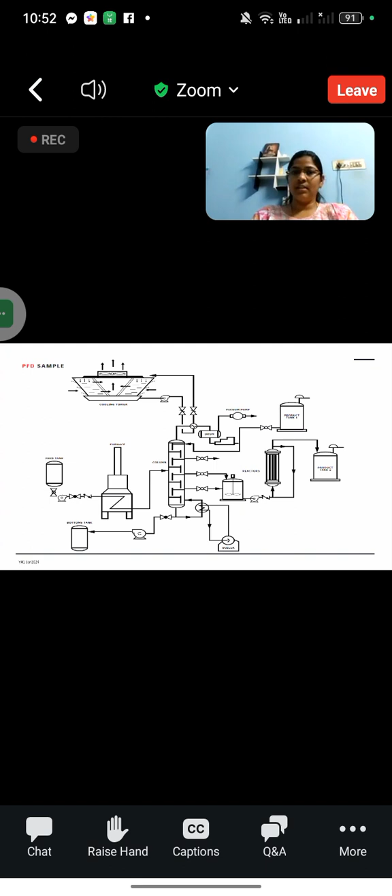HAZOP terminologies. First, this is called PFD. PFD is process flow diagram, which shows all the equipments, pipelines, everything in a brief manner. So if you see this, you can identify what is the product you are handling, where is the cooling tower, the fractionating column, what are the inputs, that means what are the upstreams and what are the downstreams also you will be knowing.

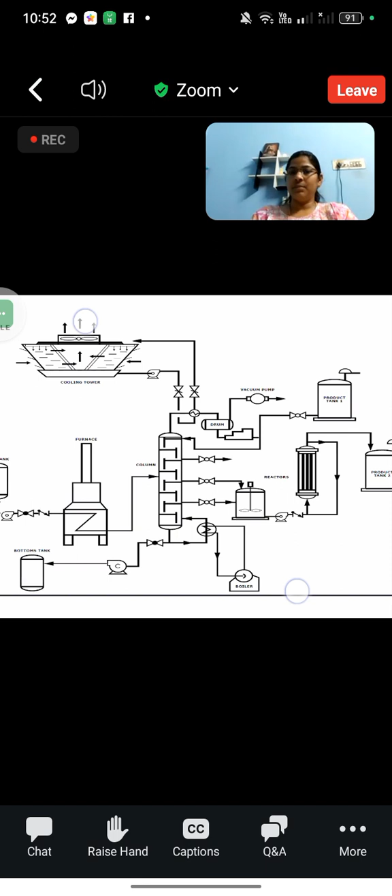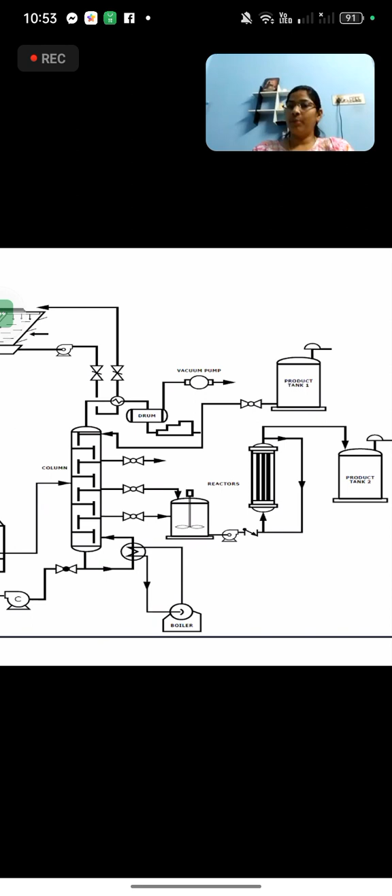So how the HAZOP is different from other hazard identification techniques is mainly in HAZOP, in design phase, after you get your design parameters, that means my fractionator has to work at 50 degrees temperature only. Its pressure has to be at 2 megapascals only. That is the designed parameters, that means your intentions. To get a product, you require some important operating parameters like pressure, flow, level, temperatures.

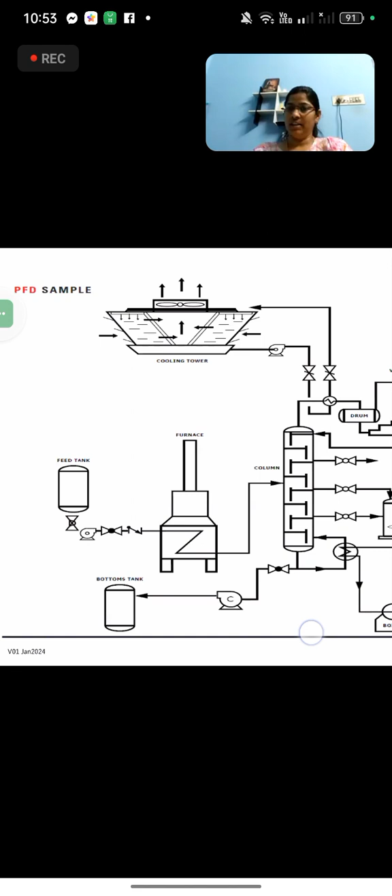So if all this deviates, what are the hazards that we are going to identify in the HAZOP study? HAZOP means hazard and operability study. The deviations in the operating parameters will cause some of the hazards. So how we have to do, which element we have to select, from where we have to proceed, how to proceed, all this we will see in the further slides.

So this is PFD. As sir has mentioned, what are the documents required for the HAZOP methodology? First thing, you require process description. What is your process? Then you require the process flow diagrams, utility connections. You require P&IDs. This is called P&ID, that means process and instrumentation.

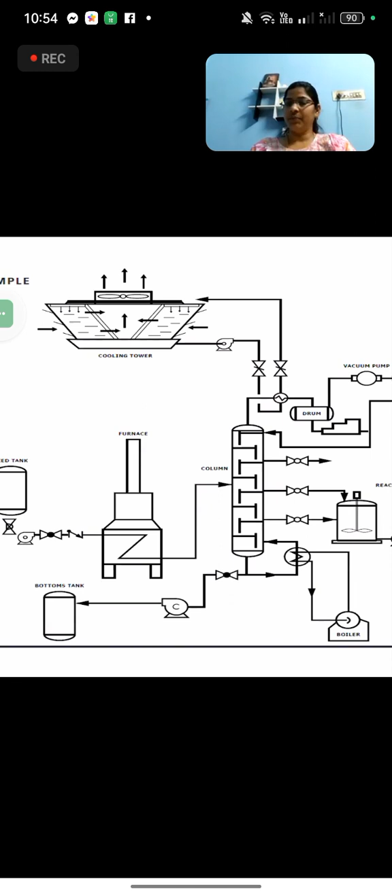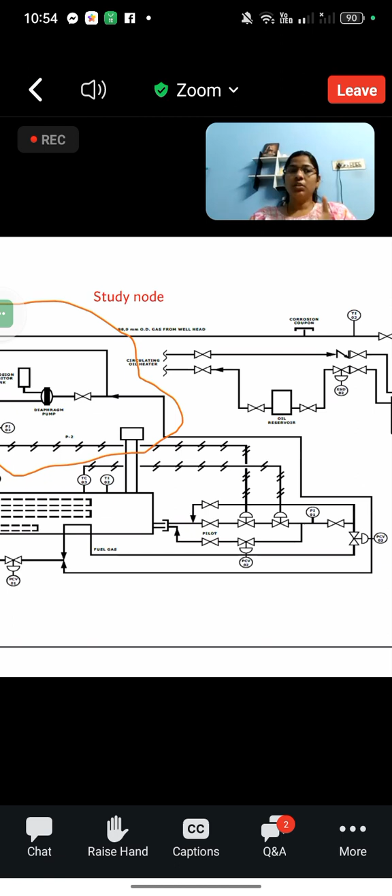Suppose you have a fractionator here. To control the flow, what is the input? What instrumentation you have kept? If it is malfunctioning, what is the failure? So this is the P&ID, process instrumentation diagram. And if you see this, you require a specialized skill to identify the elements.

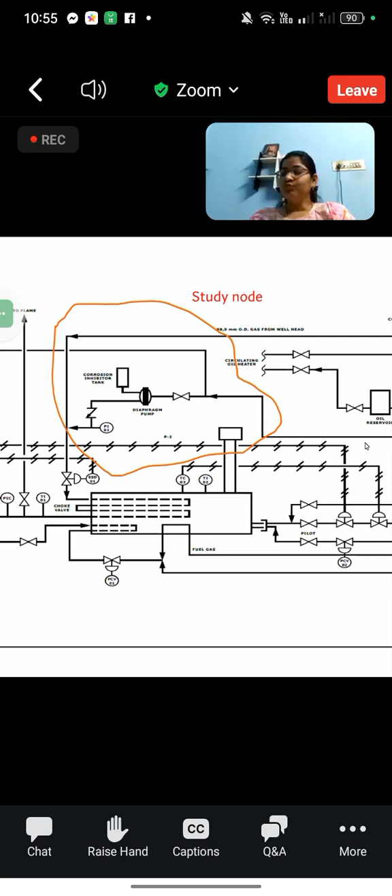Suppose this is a valve. This is a pressure control valve. This is a pneumatically operated valve. This is a manual valve. To identify the nodes and the equipments, you require some knowledge about the instrumentation diagrams. If this is the line, this is the supply line, and this line is going to the plant.

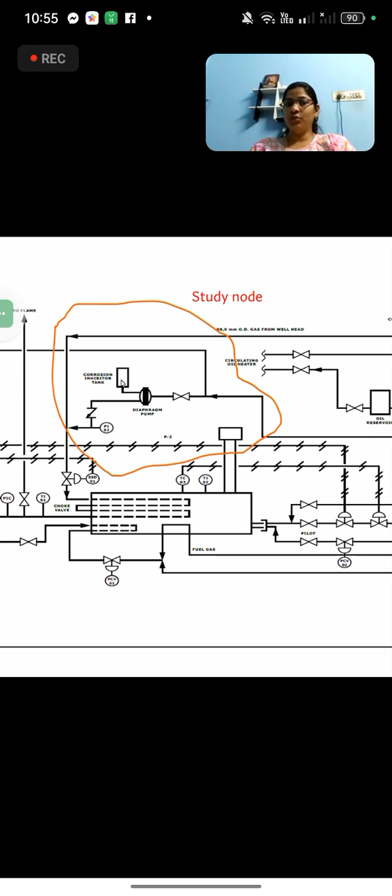So if this is the whole system, you cannot do HAZOP for the whole system. You have to select some of the nodes. Suppose in the whole system you are selecting only the diaphragm pump and the tank, then you have to study.

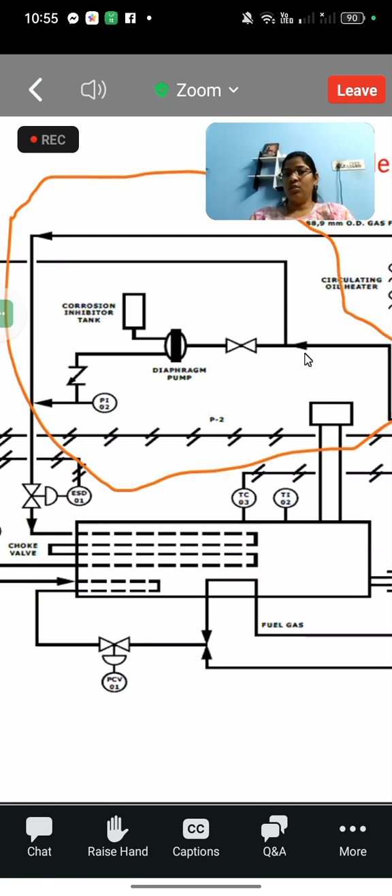So in this line, what are all the pressure, temperature, what is my flow rate? Simply, if the pump is delivering high flow rate, if the pump is delivering low flow rate, what are my consequences?

That you have to study. What could be the causes? That means this is the diaphragm pump. Maybe this is operated by pneumatic supply. So my supply pressure is less. So whom I have to contact?

So HAZOP is a proactive study. That means you're not doing it after the accident. You're doing it before you are commissioning. As sir said, you are doing this in a design phase. Some of the people have asked, what is PHA? What is the difference from HAZOP?

PHA is done at the pre-design phase. That means you have not fixed any of your operating parameters. You don't know what your parameters are to get your desired product. That means you have to manufacture sulfuric acid out of sulfur and H2O. Okay, so you don't know what parameters you have to fix to get it.

Or for ammonia, you require hydrogen and nitrogen to produce ammonia. So literature will be giving you certain parameters, but even with the simple reaction you cannot create a product. Okay, it requires so much knowledge.

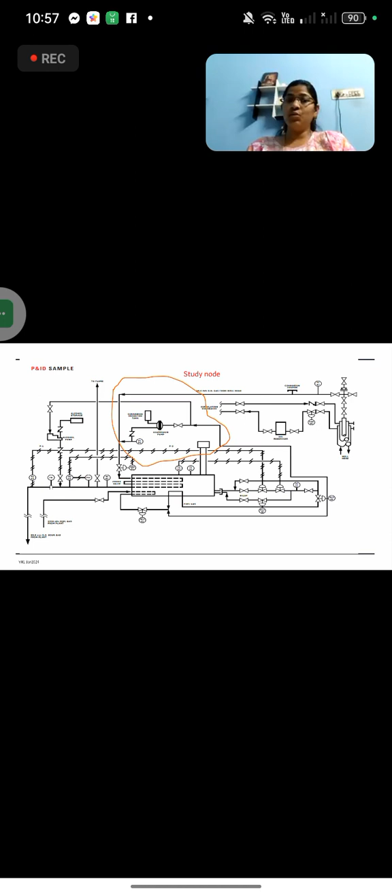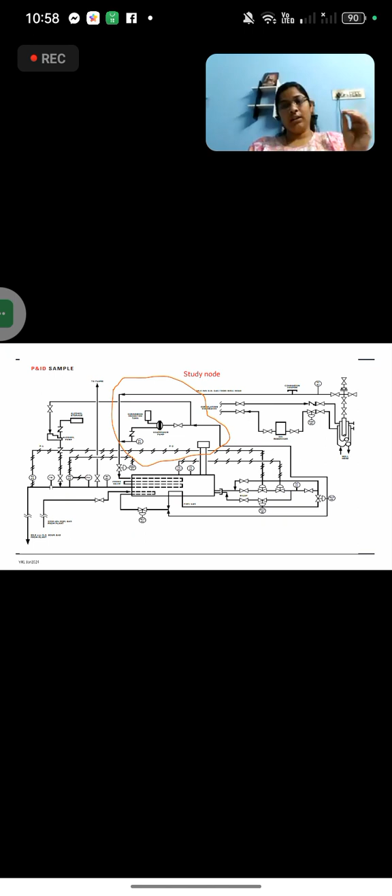I require my instrumentation team to tell me how I can recognize my pressure is low for this diaphragm pump. Okay, so if the pressure is low, can I put it as an interlock not to operate my diaphragm pump? So it should indicate to me somewhere that the compressor is bad. I am unable to produce the compressor pressure. I cannot operate the diaphragm pump. I cannot deliver the sufficient flow rate. Okay, so studying each individually is called HAZOP.

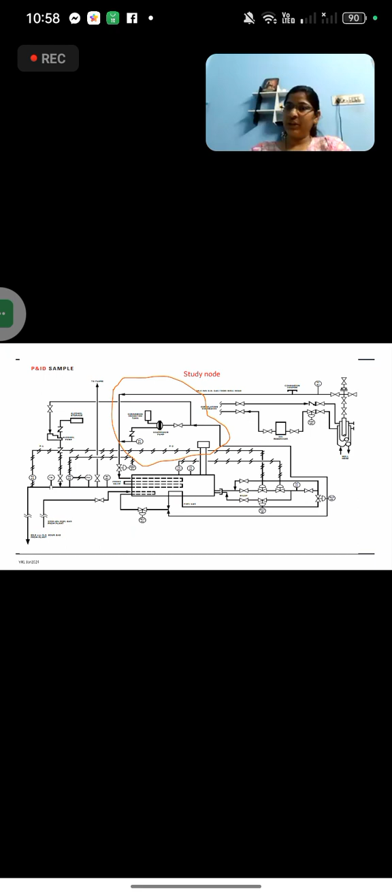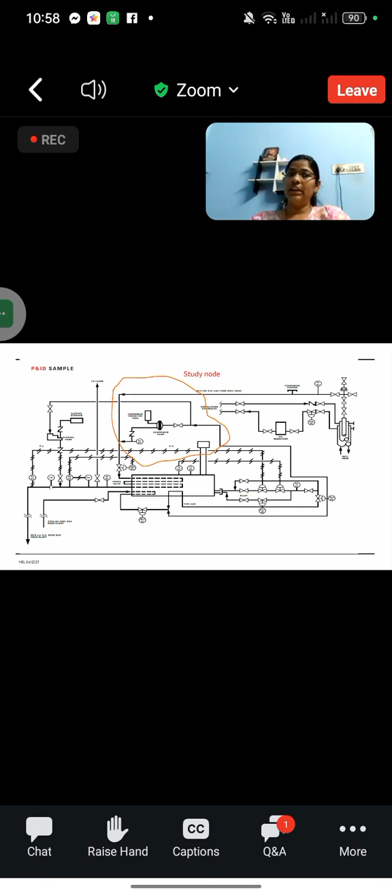Okay, so FTA and ETA also some of the people have asked about. FTA and ETA are detective analysis or reactive analysis. That means after the accident has occurred, you will be finding out what the causes are for this accident. Whereas HAZOP is a proactive study and it is done at the design phase, and as sir told, it will include so much of the team, because to set up a big plant you require all the professionals. Okay.

Okay, so as I told, selecting which part you want to study is called the study node. Your point of interest is the study node. So a study node is a specific point or an element within a process or a system that is examined and analyzed for potential hazards or deviations.

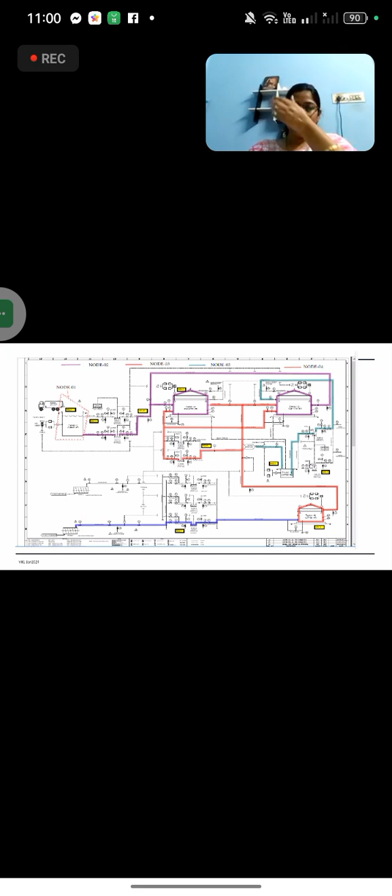My level, I don't want overflowing, so an indication should come from this tank that a certain level has been reached. Okay, then it has to indicate to the operator that the float has reached a certain level, so no more flow. The operating parameters in my tank, not to have an overflow, the indicator.

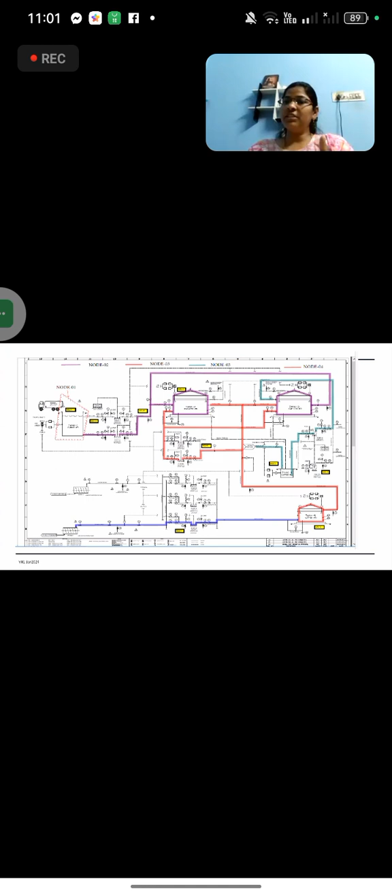And this may be like, if it is vaporizing, it is producing so much vapor. Okay, so the liquid will produce more vapors when the temperature is sufficient. Suppose my liquid boiling point is 100 degrees, like water. If the temperature is increasing beyond 100, my liquid will vaporize. So I'll be monitoring. So high temperature means temperature above 100 degrees. That means, then what is the deviation?

I'll be studying. So when you're studying all this, what is your outcome? Your outcome will be the hazards. If the temperature is above 100 degrees, it will produce vapors. So those vapors may catch fire if you have an ignition source. So you are identifying the outcome of the deviations which leads to the hazards. Okay, that is called hazard and operability study.

So study node is what you are selecting. Next, intention. Intention means what is my outcome? Suppose, for example, I have to manufacture ammonia. Ammonia is NH3, nitrogen 1 molecule, hydrogen 3 molecules, and for this I have to give 2 molecules of nitrogen and 3 molecules of hydrogen, so that I can produce 2 molecules of ammonia. So 2 molecules of ammonia is my intention.

Instead of ammonia, that is NH3, if my process is giving me some NH2 amine, that is not my intention. My intention is to produce ammonia. So for that, what are my inputs? What are all the deviations that may come? Flow of hydrogen, flow of nitrogen, pressure inside the tank, temperature inside the tank. These are the designed operating parameters. That means 2 molecules of nitrogen has to be filled in the tank and 3 molecules of hydrogen has to be filled. Not more than that, not less than that.

And temperature has to be maintained at some 150 degrees and pressure has to be maintained at 5 megapascals, and there also not more than any tolerable limit. 5 megapascals means maybe 5.01 megapascals is allowed, but not more than that, because in our processes everywhere tolerance is there, because we cannot fix it with the existing setups. So my intention is this. If it is deviating from any of this, that may lead to a hazard.

Deviation means departure from the intention. That means my intention is 2 molecules of ammonia, 2NH3. Instead of it, 3NH2 was formed, it is a deviation. Temperature has increased, it is a deviation. More than 150 it has gone, less than 150 it has come. My jacket water is not working, that is a deviation. My pressurized reaction has to be carried out, somewhere a pressure leak is happening, I am unable to maintain 5 megapascals. That is deviation.

Instead of nitrogen, some pipeline has been interconnected because of my new employee. Instead of nitrogen, some chlorine gas has been introduced into the reactor. Chlorine plus hydrogen, what will form? HCl acid will form. That is totally a deviation and it will lead into a big mishap. Mishap means accident. So the deviations we know, the intentions we know. For each parameter, if it is deviating, what are all the hazards we have to find out. For deviating these parameters, what could be the causes we have to find out in HAZOP methodology.

Causes means what are the factors or the conditions that lead to deviations we have to verify. We have to come out with brainstorming sessions. So consequences, as I told, instead of nitrogen, chlorine supply was given. What could be the consequence? HCl is highly concentrated acid, more than 33%. No ammonia has been produced yet. Instead of it, it is going beyond a certain temperature. It will lead to explosion. It could be a physical explosion without fire. It's like a hazardous environment.

So guide words and intentions. Our operating parameters, most of the operating parameters are like temperature, level, pressure. If these are deviating, how to do? The words are simple words like no, less, other than, more, like that. These are the simple guide words. Add them to your operating parameter, then you will get the deviation. So these are the guide words: no, less, more, part of, as well as, reverse, other than.

No means negation, totally. Nitrogen was not filling, only hydrogen is filling. In a reactor, if two chemicals are there, only one is filling in the tank and the other chemical is not being supplied, and the same temperature and pressure is maintained, it will become a big hazard. That means nitrogen is not there to consume the hydrogen. Hydrogen is a highly flammable gas. If you are bringing it to a flammable limit, that's all, it will explode, in a confined reactor environment.

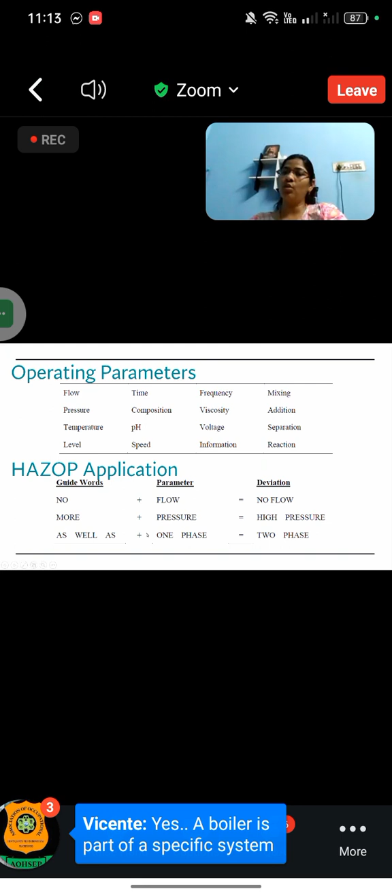which... than 5 megapascals, that is becoming 5.5 megapascals. High pressures are always like bombs. Then, instead of nitrogen plus chlorine, nitrogen, chlorine and hydrogen is coming. What are the favorable reactions that will form? Because nitrogen is an inert gas, it will stay like that. Nitrogen atmosphere may form reaction under nitrogen atmosphere.

So we'll see the HAZOP method. How we have to do the HAZOP, so how to do HAZOP we will see now. So preparation, we have to select the team. Okay, what is your

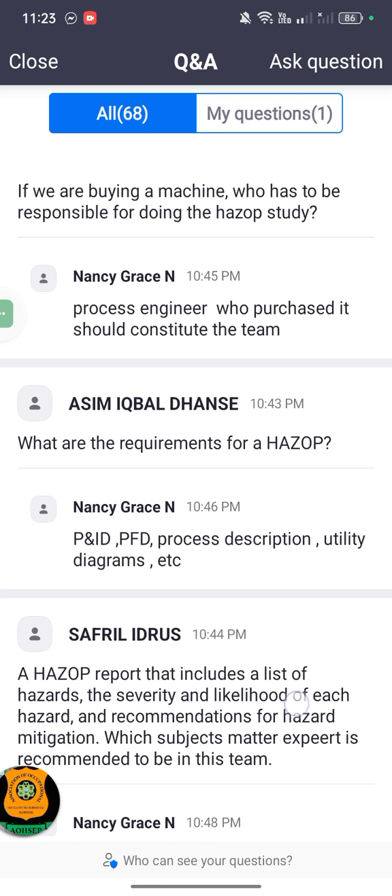The ultimate thing is production. Production means if you lose 1 hour of production time, the loss could incur in lakhs, or in some places it may go to crores also. So how fast can I come back?

How fast can I come back and rectify this? I can rectify very fast when I know the situation, when I know if this happens, what is my immediate corrective action? Usually they will be doing periodical maintenance, corrective maintenance. What is my corrective action? What is my immediate remedy? How to mitigate the hazard? All this comes under impact analysis.

And risk prioritization. As I told, HCl will have a higher risk and water splashing will have a lesser risk. So low risk activities usually will be taken care of by detection mechanisms, and sometimes we will separate them from the process areas. Like this, first we have to prioritize the risk, then identify the redundancy mechanisms and corrective actions if it is occurring in real time.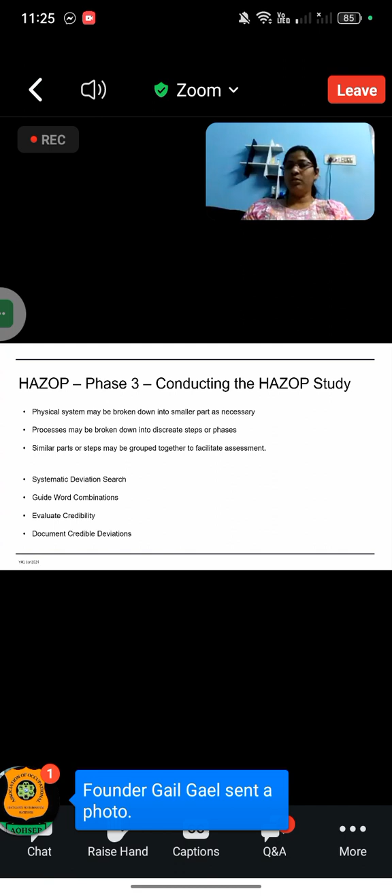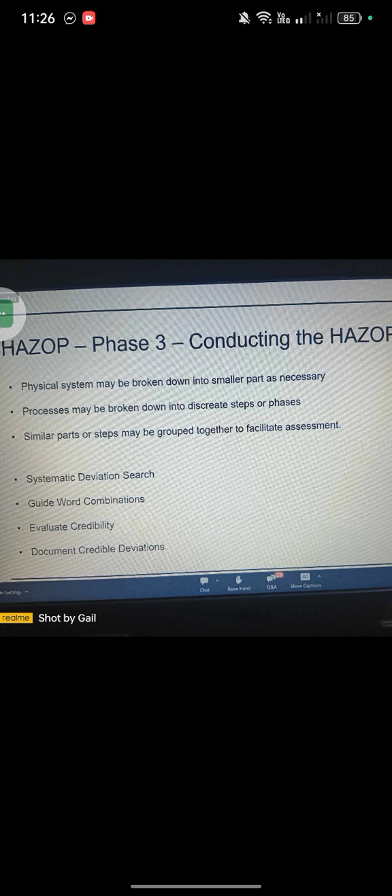You have to apply 2 or 3 guide words for a single parameter also, and guide word combinations also you have to do. All these things have to be recorded properly, then only you can mitigate the hazards in real time. This is done at the design phase, and as sir told, it will be done after the modification. Any modification occurring means then also it will be done.

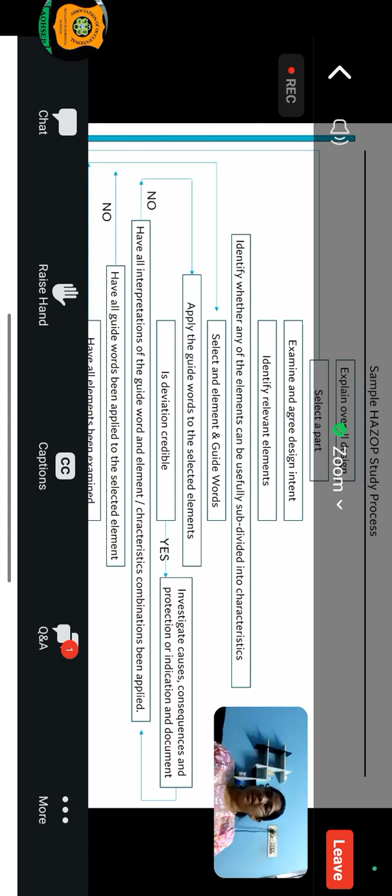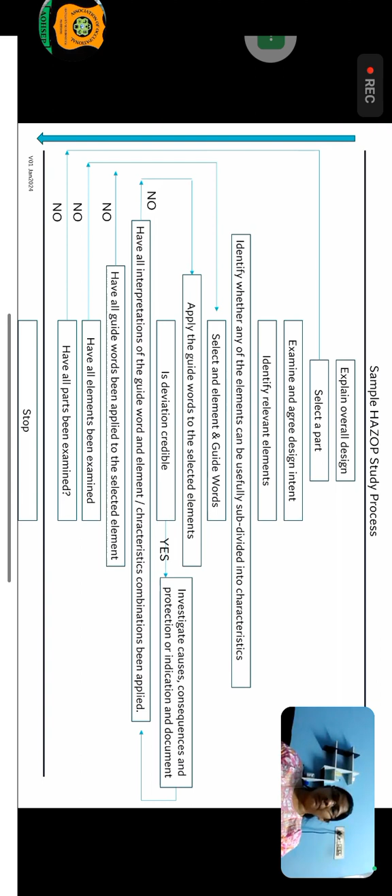So this is a sample HAZOP study process. First, explain the overall design, select a part, that is the study node, examine and agree on design intent. All the team members have to agree to the design operating parameters. Identify relevant elements, identify whether any of the elements can be usefully subdivided into characteristics, select and apply the guide words.

Is the deviation credible? That means the deviation may lead to hazards. Then immediately investigate causes, consequences, and what could be the detection mechanisms. Then have all interpretations of the guide words. Have all guide words been applied? That means again you have to select another parameter and apply the guide words and examine whether the consequence analysis is sufficient or not.

Based on that, remedies are sufficient or not. Apply the guide word, generate a deviation, probable causes, and possible consequences. Next, we have to document the deviations, record the consequences, and recommend corrective actions.

Why do we have to do this? We are doing this exercise to prevent accidents, to mitigate the accident. If at all it is occurring also, we have to bounce back, immediately rectify the hazard, and protect our workers, environment, and property.

Instead of visual inspection, consider an alarm for low detergent reservoir level as the future action. With this, you can get the level through a level indicator - through a float you can control the overflow also, and the level indicator will give you the level indication in the tank. So whose job is this? It is the engineer's job, the process engineer's job.

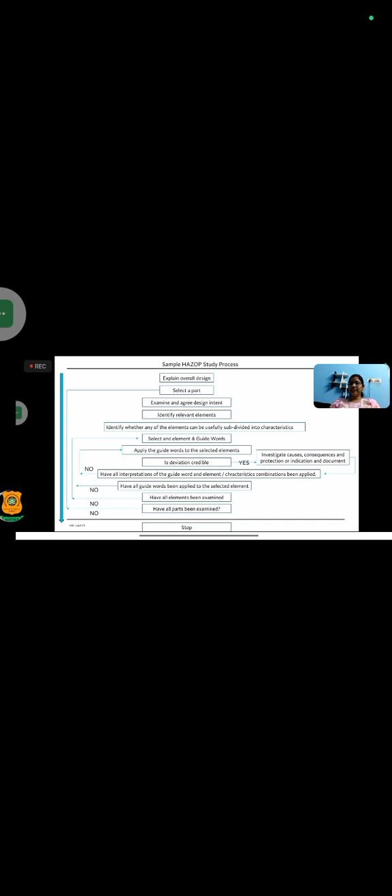HAZOP action - whatever action we have just seen, that has to be recorded.

So documents for HAZOP review: updated process and instrumentation diagrams, operating instructions, a plot plan with the location of various equipment items. The plot plan will tell you additional consequences, like where the pipe is bending, is it coming from underground, is it going above the reactor or below the reactor. All these things matter because this may lead to obstructions also.

Process flow diagrams, interlock description - that means, as in the previous example, if a tank is having an interlock that below 30% level, the cleaning operation or cleaning machine will not start. That is an interlock. Set points for all the interlock sensors.

Vessel capacity, design pressure - vessel capacity means I have to fill a 1 meter cube volume, say 500 liters, literally half. So capacity is a must. And design pressure - when you are designing a vessel, the thickness of the vessel is taken care of based upon the working pressure inside the tank.

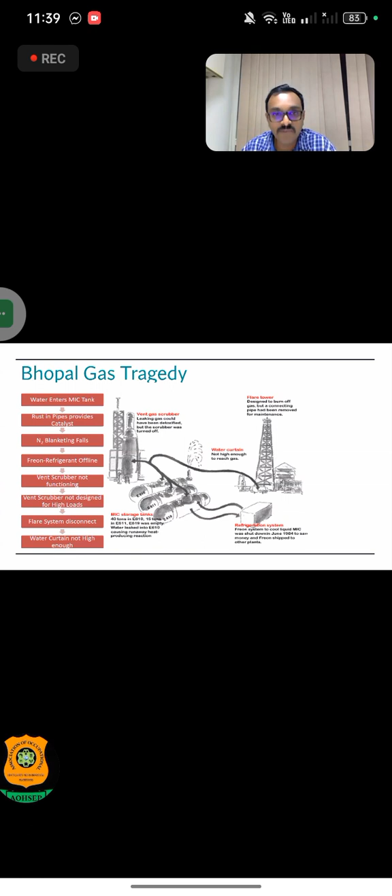As all of you know, what happened in the Bhopal gas tragedy was a complete misconception of the entire engineering technique itself, where they hadn't identified what could go wrong. Yes, she's back, over to you Nancy.

Okay, so if they would have done the HAZOP study in 1984, that means if the pipeline disconnected to the vent scrubber in the case of the MIC gas releasing, they would have analyzed the consequence. The water curtain, what height it is reaching, whether sufficient flow is there for the water curtain, what could be the consequence. For safeguards, if they would have done the HAZOP, they could have saved thousands of lives in Bhopal. So water enters the MIC tank.

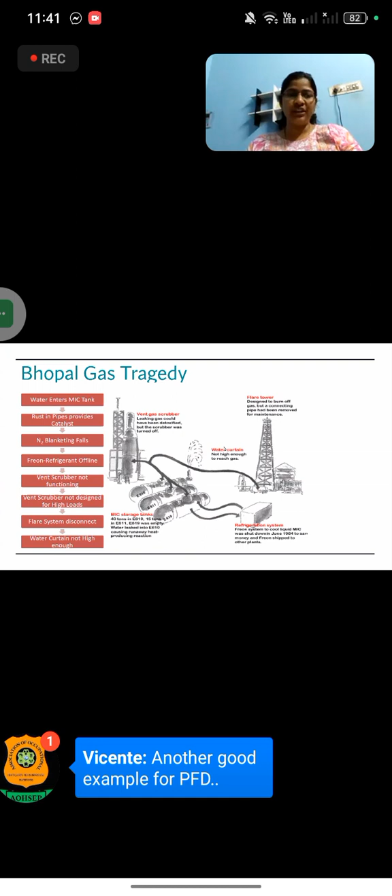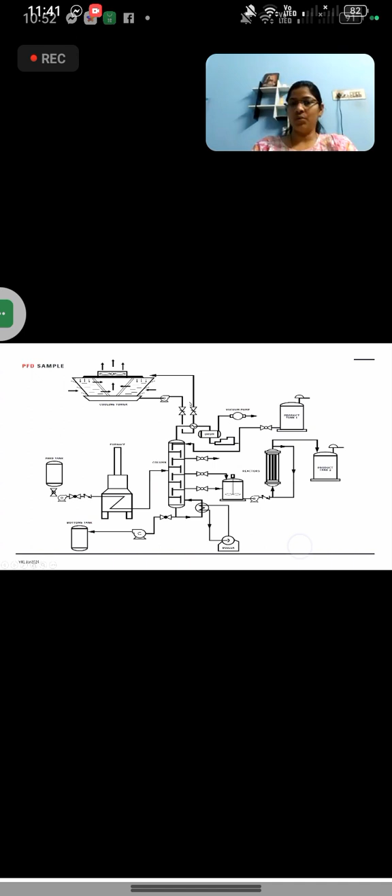See, actually what happened - briefly I will tell you - nitrogen blanketing failed, water entered into the MIC tank, and a runaway reaction happened. If this was also analyzed - if water is entering and nitrogen blanketing is failing, what could be the consequence - the runaway reaction happened.

It pressurized the system and it leaked out of the system because of the old system also - the pipelines were having leakages. All these things were there. It didn't just happen in that one night.

So what they have done - if this runaway reaction is happening, they know they have to cool the system to control the reaction. For that only they kept the refrigerant system, freon, but this freon was sent to another plant, so there was no refrigeration system working.

So there is a vent scrubber where it will scrub the MIC gas so that the toxicity will reduce if it is going out. The water curtain also will reduce the toxicity. The flare tower will burn the MIC gas, converting it into carbon dioxide and other things.

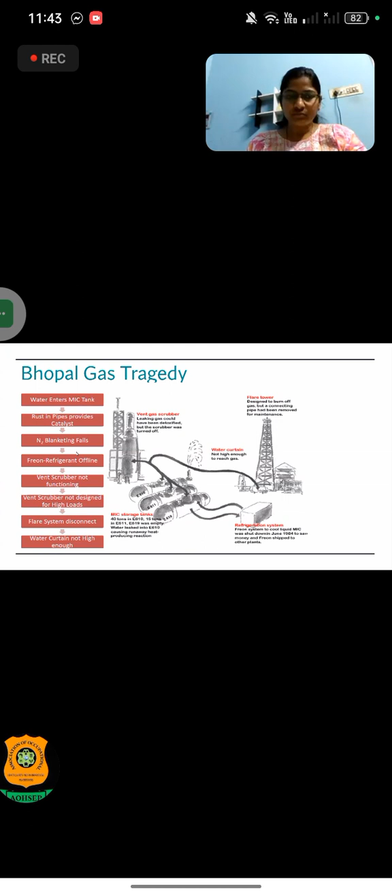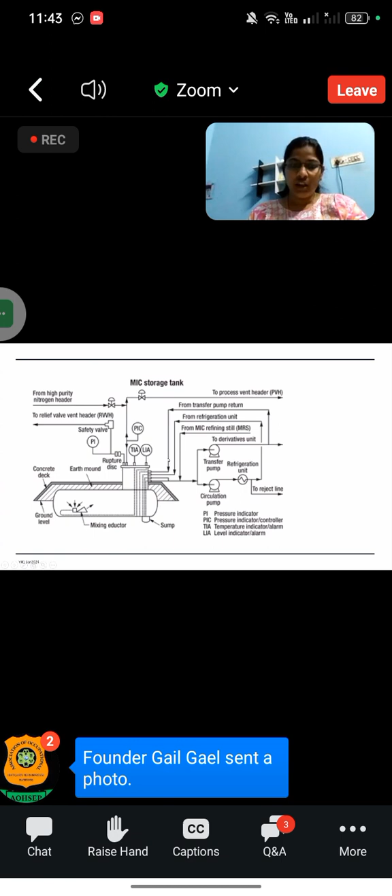Total means like a hooter kind of thing, like a danger siren - then also some people would have been rescued. And the means the safety valve, if it is connected to the scrubber circulation pump - each and every node, if you are studying, this will give you so many consequences.

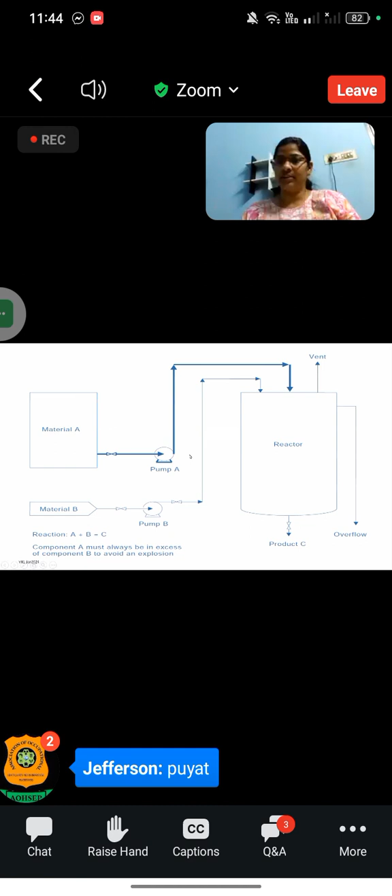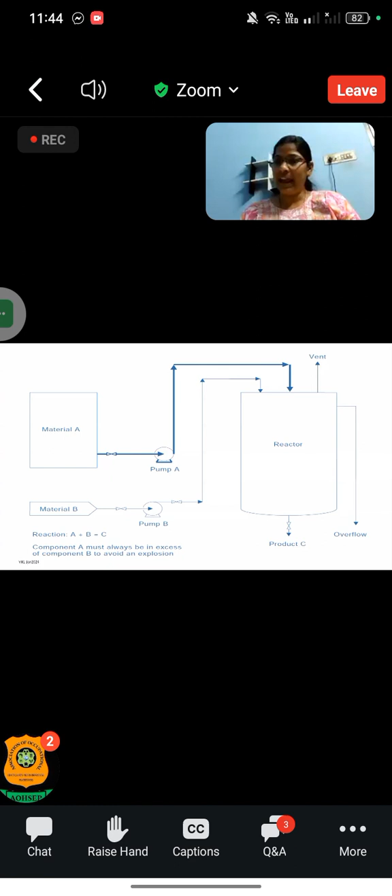Okay, we'll see a simple example. So material A and material B have to load into the reactor. For that, pump A and pump B are there. For example, if I am selecting pump A - when pump A will not work, material A is not there in the reactor, when will it happen? No flow of material A will happen, which may lead to explosion, for example.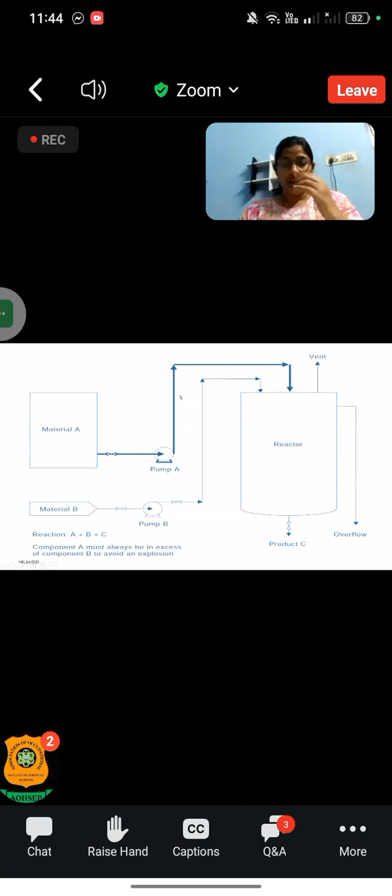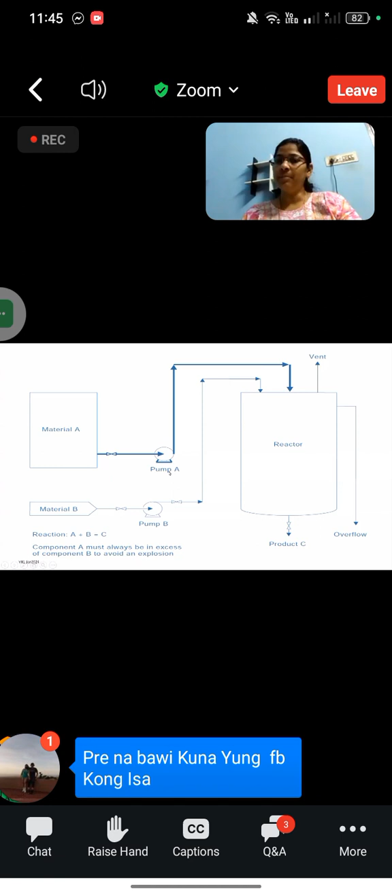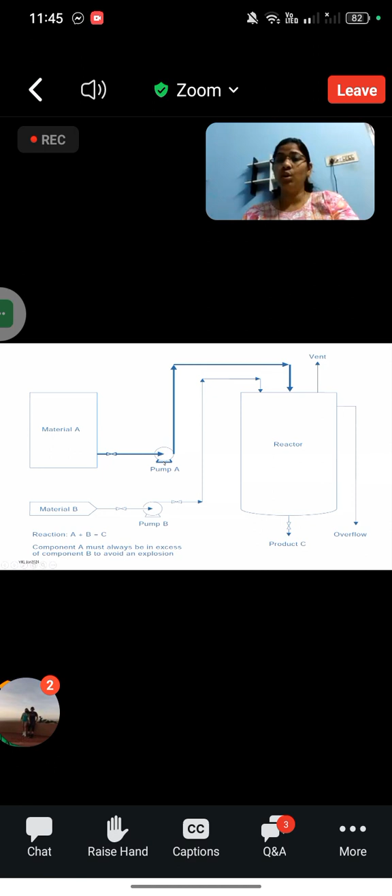Then what are the causes for this? There is no material A in the tank, there is no sufficient discharge from pump A, valve is closed, or the line is ruptured. These are the possible causes for no flow.

So we will be identifying the diagram and who all the team involved are, and we will be noting down the transfer line from supply A to reactor. So source is tank for A, destination is the reactor, activity is transferring.

So 'no material A' is the deviation. Possible causes: supply tank A is empty. Consequence: no flow of A into the reactor, it will lead to explosion. Existing control: nothing is there. So the situation is not acceptable, and required actions: if there is a low alarm, trip the pump.

More material A - more material A in the supply tank - the tank will overflow beyond area. Existing control: there is nothing. This would have been identified during the examination of the tank, or we can put a float to control the overflow.